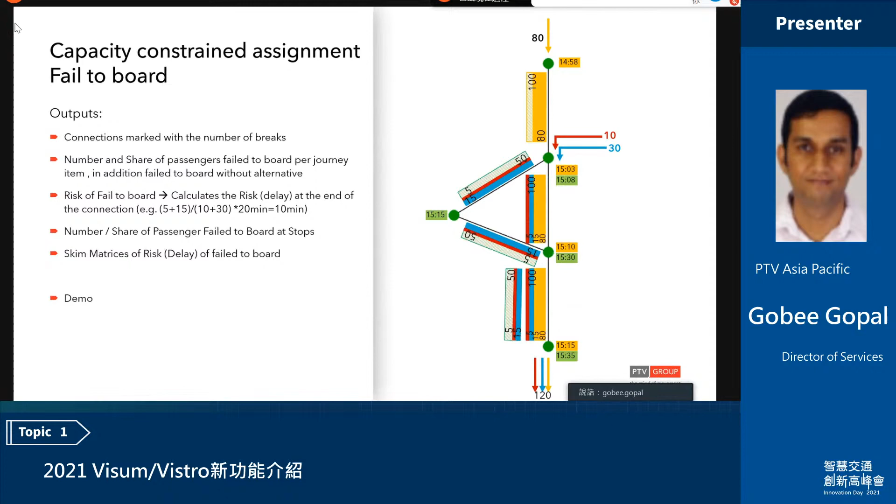So then the second feature in Visum 2021 is dispatching a ride-sharing fleet with e-vehicles. So in these features, we have put two main sub-features, which are limited range and long-lasting charging. So limited range, these are the ranges which can be included to make the dispatching of ride-sharing more efficient.

So battery electric vehicle, define ranges, conservative strategy, calculate longest distance to recharging station in network for buffer. At minimum charging threshold, return to charging facility, and recharging is priority. So no trips are served.

And the second feature which has been added is long-lasting charging. So now the user can define charging time, and at the same time they can define always complete charging cycle. So these two features will improve how e-vehicles operate in the Visum platform.

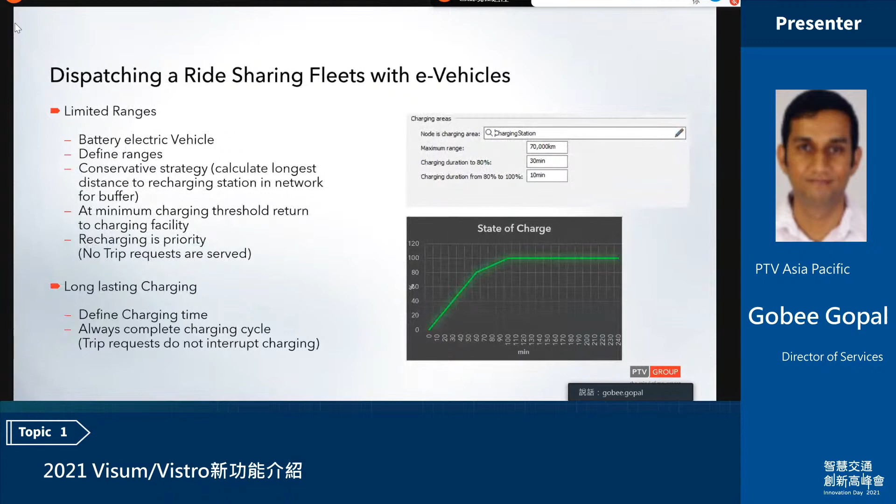It also ensures the vehicle starts at a predefined location in the network. Previously, the vehicle randomly showed up at the first pickup location. So this is for the ride-sharing improvement, which you can use in Visum 2021.

So then the next ride-sharing feature improved in Visum 2021 is the intermodal assignment. So for intermodal assignment, here you see the workflow of intermodal assignment. The crucial point is that for the route search and route choice, we need travel times of ride-sharing links. There's no formula which gives us the value.

So we perform a tour planning simulation and derive the travel times from the experienced travel times. To add some stability, we aggregate the experienced detour factor of all realized trips inside a certain main zone relation. Then the second step is we apply these average detour factors to the ride-sharing links.

So on the right side is the screenshot of the PuT path legs which you can define, and perform a new route search or route choice using the updated travel times.

So this goes around many iterations and takes some time. So there's a multi-iteration required, and at the end, we have a well-converged detour factor, but when we restart the assignment, we could not use that as the initial value. The point is,

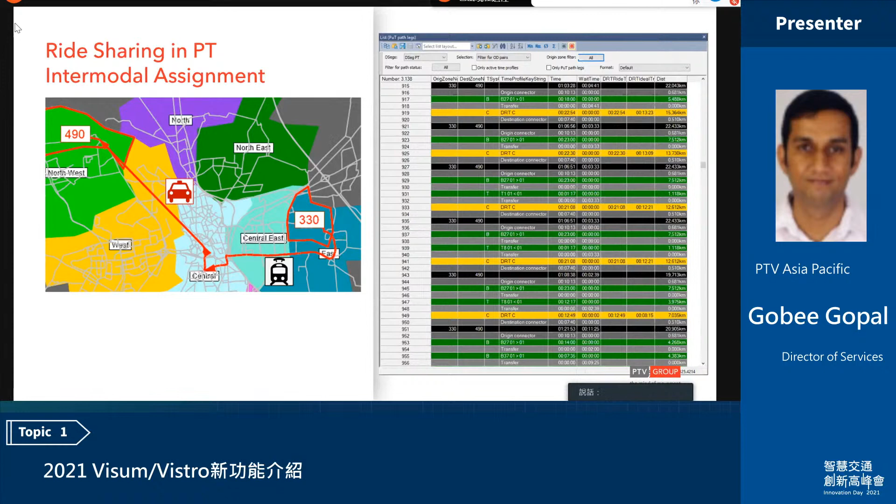the first search, for the ride sharing in PT intermodal assignment, intermodal assignment between private vehicle and public transport. Okay, so the improvement for the intermodal assignment is that it has been done faster, up to factor 2, more stable and faster convergence, a warm start.

So this is how the intermodal assignment works. If you look at the intermodal assignment workflow, the macroscopic and the microscopic. The macroscopic is more of the route search, route choice, then the split route. Then after that it goes more detailed, to the microscopic level where trip requests are generated, and then after that Visum will do the tour planning. Once this has been calculated, this will be passed back to the route search.

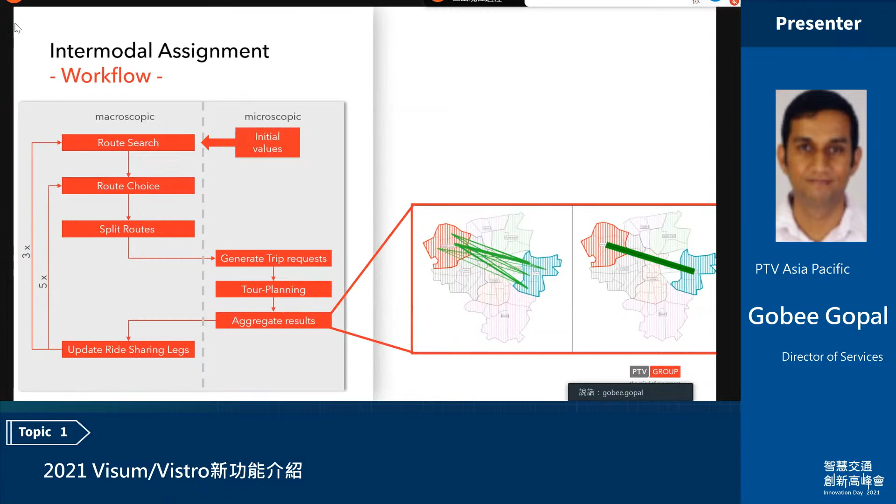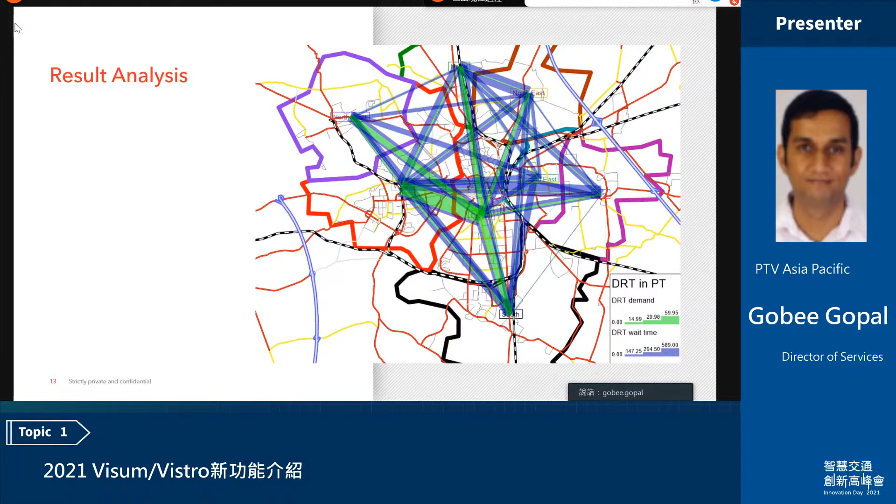So at the same time, after the tour plan is calculated, the result will be aggregated before it is passed to the macroscopic. And this is how it looks like in the matrix format. So the result analysis, you will see the DRT demand, so demand responsive transport demand, and the waiting time. So how long the ride sharing vehicle has to wait. Same time, what is the demand for the ride sharing vehicle.

So in case you don't plan, the DRT without tour planning, it's just between the route search and route choice.

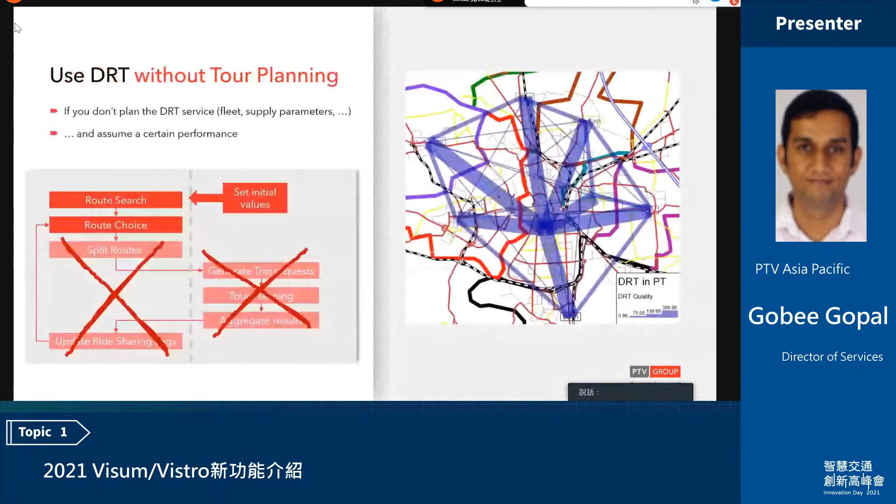So the third feature which has been improved is the auto demand calibration tool. So we all know that for the demand calibration tool, if model and reality have a different modal split, this tool is useful to analyze the reason for the difference. So person group segmentation is inappropriate or different behavior in different areas. Extend the model accordingly. There always remains a certain difference that cannot be solved. So sometimes manual calibration is extremely time consuming.

So in Visum 2021, PTV has included a demand calibration preparation. This demand calibration preparation is a built-in function which you can find in the Visum add-in, which automatically calibrates the demand model. So here I would just like to show that with this new feature it can do more than one demand segment. So at the same time, you can calculate the average model-calculated work trip, education trip, shopping, leisure, and home.

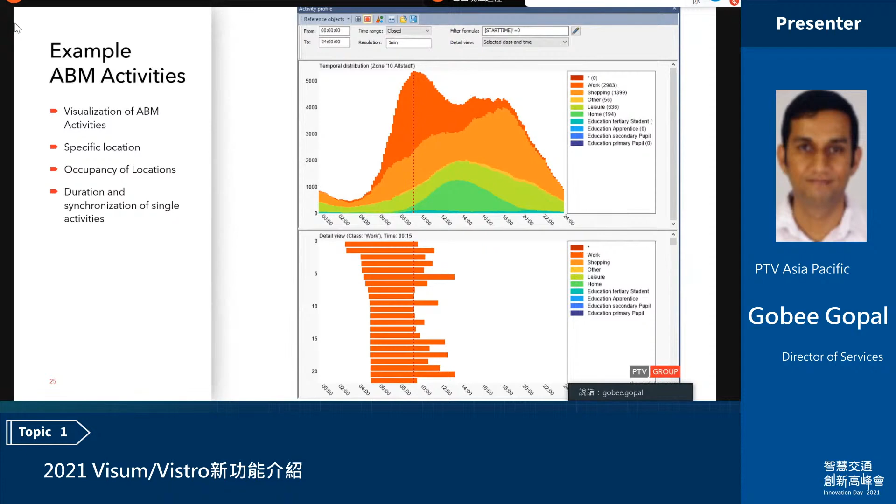And line blocking. So for public transport planning, previously it was similar, more in a tabular format. Now PTV has improved it and put it into more graphical features. So for line blocking, visualization of line block items, amount of buses to operate a timetable, classified by journey, layover, specific to charging depot, where you can define the number of charging stations needed or visualize the charging power needed.

So the last one for Visum where there is improvement in visualization is simulation-based assignment. Previously it was more of a color classification in Visum. A good example is the volume capacity ratio showing the bottlenecks. But now there has been a big change.

So the improvement we made is that with the SBA visualization output, you can see agent-based simulation. The motivation for that is to better understand the assignment result, to identify network coding issues, to support calibration efforts, and to present SBA results. So it's more animation rather than just a color classification. I'll show you a video.

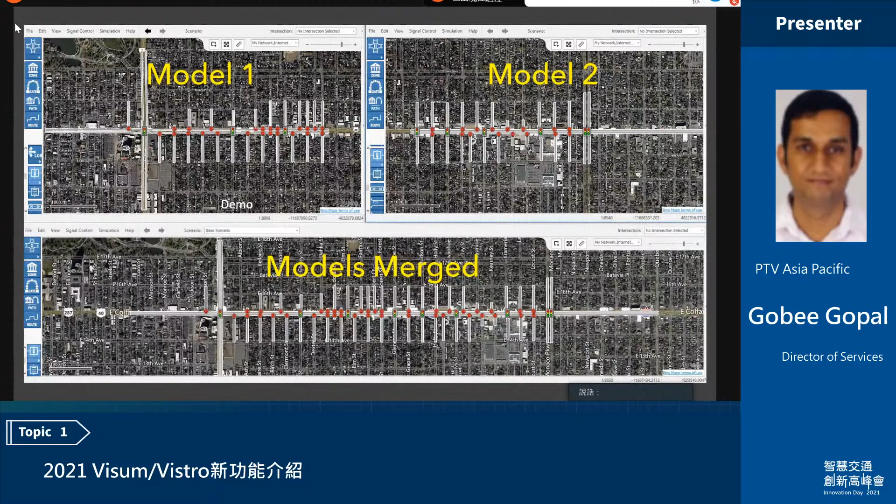Then model updating. Updating base model scenario data like signal timing, geometry, lane configuration, or volume. Useful for updating peak period, time of day information, or updating base model data from a test scenario. So the model updating feature enables you to convert external numerous base model files into one managed PTV Vistro file utilizing scenario management.

So with model updating features, you can import the turn volumes and the signal timing from a different model into a new model. So you don't need to do all this copy paste. You can see all these checkboxes: if you want to just import the signal timing, geometry, or turn volumes, then with a click of a button you can import directly into your new model.

So model updating includes traffic signal control summary to list and edit traffic signal control ID numbers. Manage your traffic signal controllers with an editable description field. Provide details about the signal controller like manufacturer, type, and last inspection date.

So under these features, you can create a traffic signal control database in Vistro, so that you can do a traffic analysis and at the same time manage all city-wide traffic signal control information in the PTV platform.

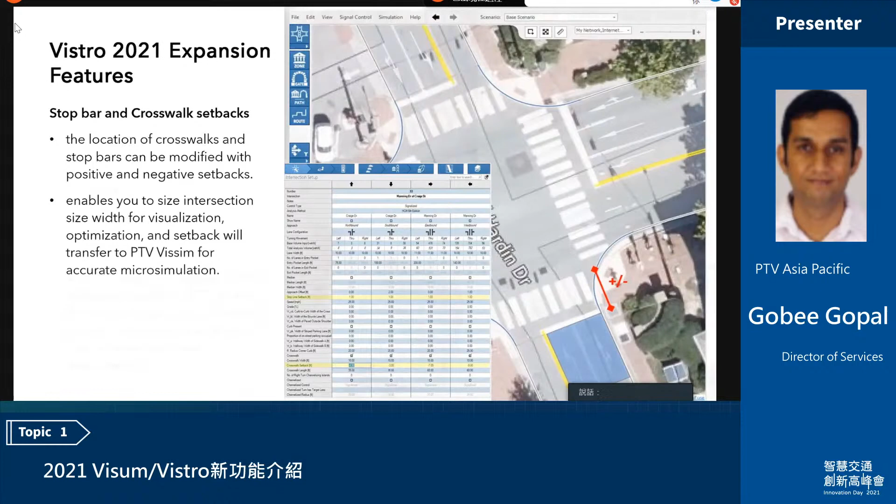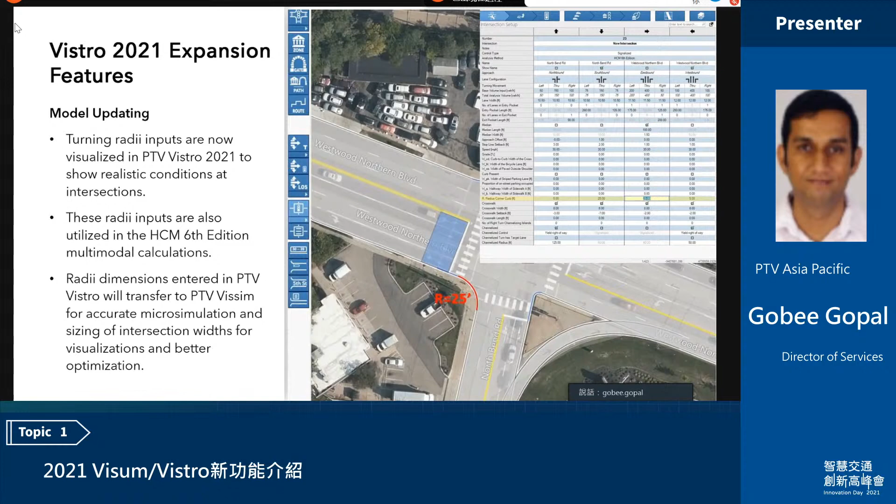So this is what I meant. With the previous version, when you export your network from Vistro to Vissim, you still need to do some minor adjustments, but now this has been minimized.

So the third Vissim improvement enables you to create a powerful 3D out-of-the-box simulation with a click of a button directly out of your Vistro 2021 model, resulting in huge time savings. You don't need to create and do the same work in Vissim. So once you have everything built in Vistro, when you export, all the 3D features are in Vissim.

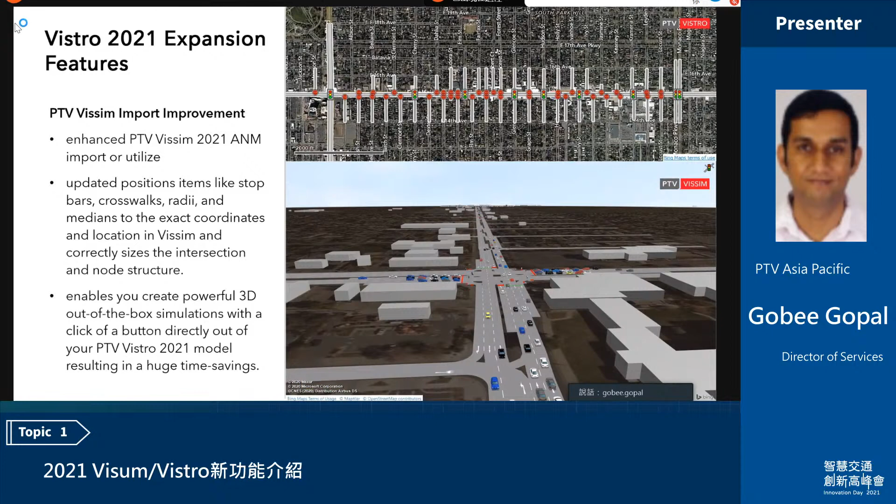Another improvement included in Vistro 2021 for Vissim import is the interchange detail or the geometry detail. So you can define in Vistro exactly how the interchange or intersection looks like. And once you're happy with the network, with the demand you can export to Vissim. So in this case, you can save a lot of time: you do all your analysis and optimization in Vistro, and to visualize that you can export to Vissim.

So that's all for Vistro 2021 and Visum 2021, the new improvements which PTV has introduced.

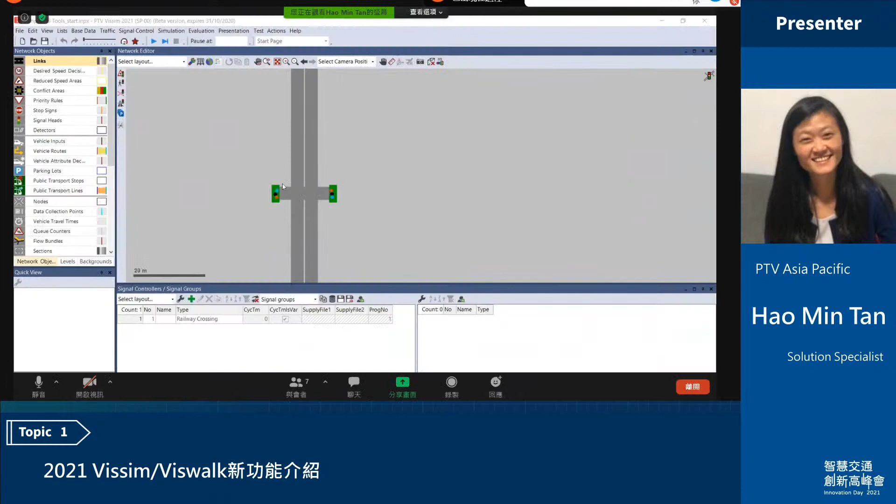So now I will quickly go to Vissim, and let me know if there's any issue seeing Vissim on my desktop. If you see here, what we have is a pedestrian walkway, with the vehicle link as well. This is the beta version of Vissim 2021. And you see there are these new tools in the vertical toolbar now.

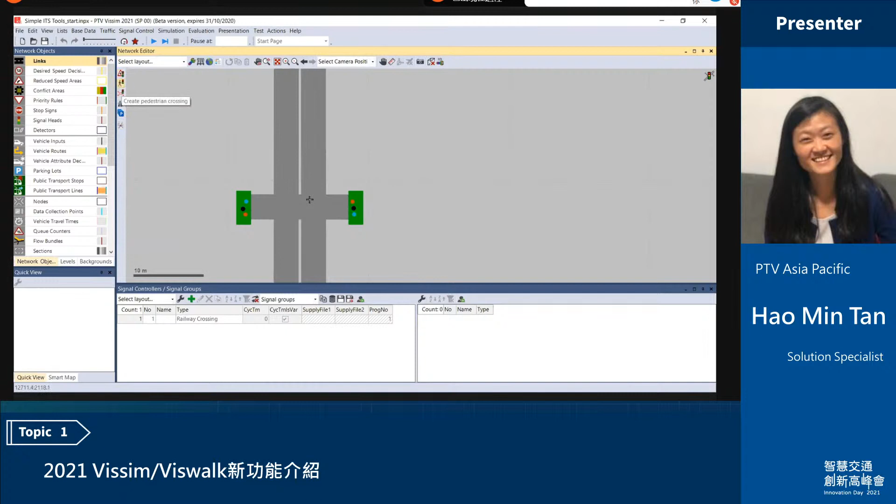If I click on create pedestrian crossing and just hover, I can have a preview of what it looks like, and if I'm happy with this, I can click OK. What happens is that it replicates the push button effect, where when a pedestrian is detected on the detector, the signal state changes for the pedestrian. A similar concept applies to the two-stage actuated signal controller. This is based on the major flow and the minor flow.

So if I click on this one and I say I want to create the two-stage signal controller, first I define the major flow, and then over here I click on the junction, and I again see a preview, and it is exactly what I want as well, where there is the actuation on the minor road, which changes the signal head for the major road, and once that is done, I click OK.

So in this beta version, the toolbar for the railway crossing is still under development and under review. So what I did here was already creating a railway crossing here, and this is based on the check-in and check-out. So when the train is detected over here, then the signal controller starts changing, and then when it checks out after, then it changes back.

And again, we will go to the newest one, which is the ramp metering. And for this one, you can again select straight from the toolbar, and then you put it on the on-ramp, and then the detectors on the major road. And then these attributes as well are changeable by the user, but now we use the default. And once that is done, you can quickly see how these actuated controllers are created.

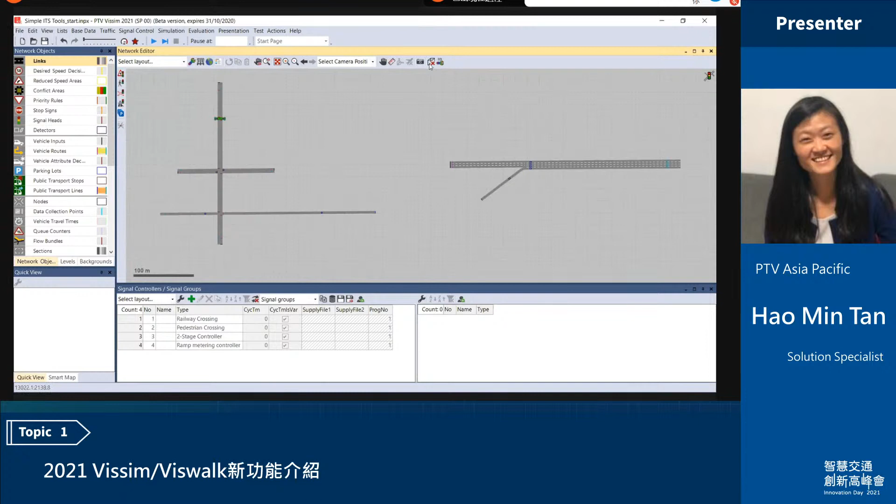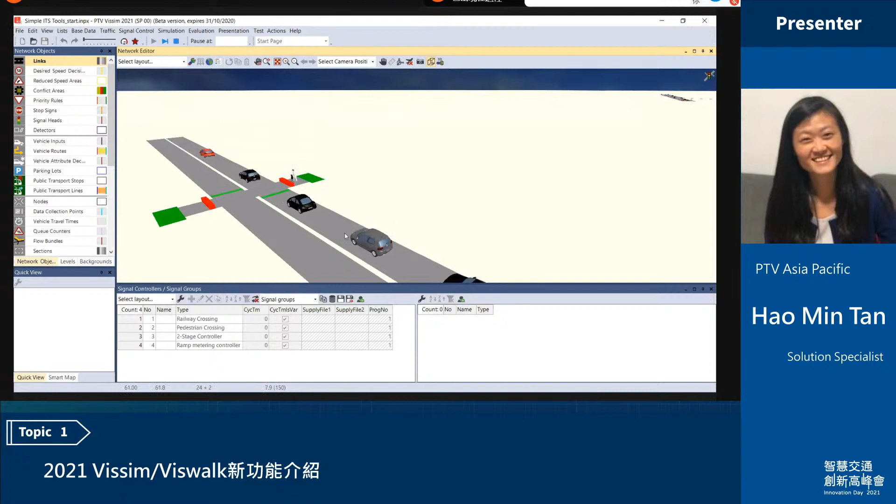I go back to the 3D mode and I play the simulation. And what you can see here is only when pedestrians are detected, then the signal changes for them. Similar concept as well for the vehicles on the minor road. Only when they are detected, the signal changes as well.

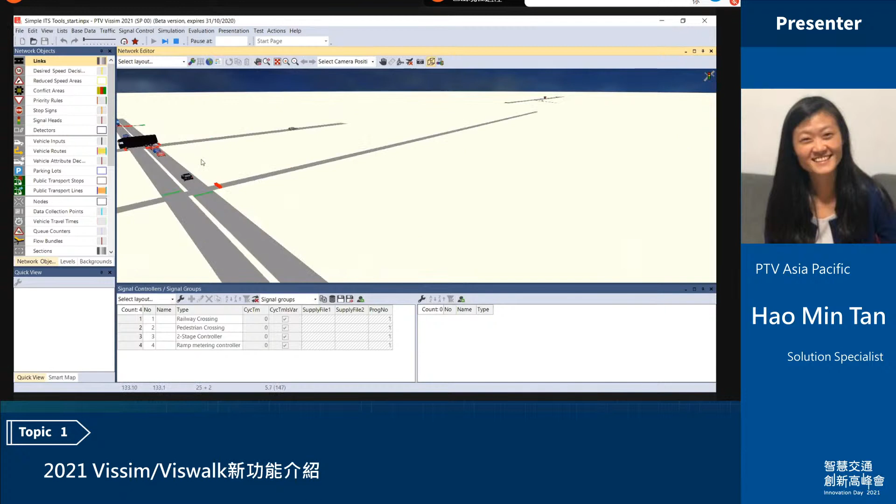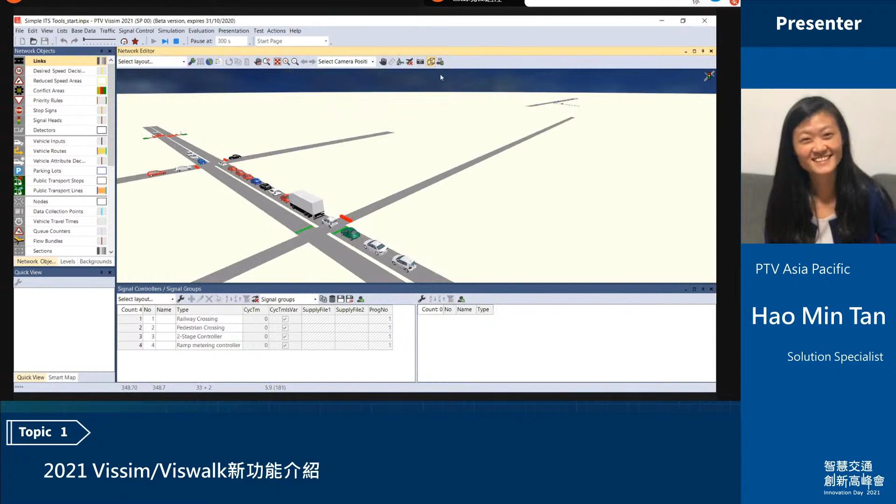And over here, let me just quickly go straight to second 300 when the tram is supposed to enter the network. And over here, you see that once it gets detected, then it just gets green until it goes through the check-out detector. So this is what we wanted to show from the simple ITS tools built in now in Vissim. And I will go back to the presentation.

All right, so that was a preview of the simple ITS tools in Vissim 2021. Going next into parking evaluations. So at first, a little explanation. In Vissim, there are the individual parking spaces, and many parking spaces can be grouped into a single parking lot, and parking lot groups can encompass a few parking lots. And in the old parking lot dialog, for the dynamic assignment tab, it's called the parking lot group. In Vissim 2021, we have changed it to destination group to better represent the meaning behind it for dynamic assignment.

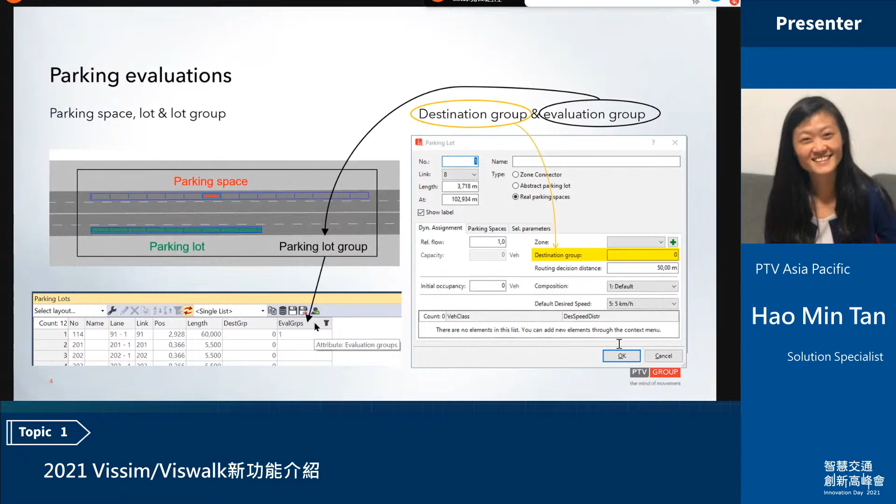And for evaluation group, we have a new attribute that is used for parking evaluations. Now you can find it in the list only, but after the release, it will soon appear in the dialog as well. So the new parking evaluations are available for individual parking spaces, parking lots, parking lot groups, and even for parking routing decisions. And on the right side, you can see that there are these new parking states available, including when vehicles are blocked while leaving a parking space or when they are back to their main route and driving to a parking space as well.

So what do you get from these new evaluations? Many evaluations for individual parking spaces, lots and lot groups, like number of vehicles entering, number of vehicles parked, the occupancy rate, the parking duration, and many more. And on the right here, you can see for parking routing decisions, there are extra evaluation outputs as well. And as usual, when there are evaluation outputs, for graphic analysis there is an improvement as well.

So if you see here under edit color scheme, you can have color schemes for individual parking spaces, like what you see over here, and then for parking lots made up of many parking spaces, you can have uniform color across, or even for parking lot groups encompassing many parking lots. And for individual vehicles, you can now color them based on the new parking state. So this is the look into the new parking evaluations output and the graphical analysis.

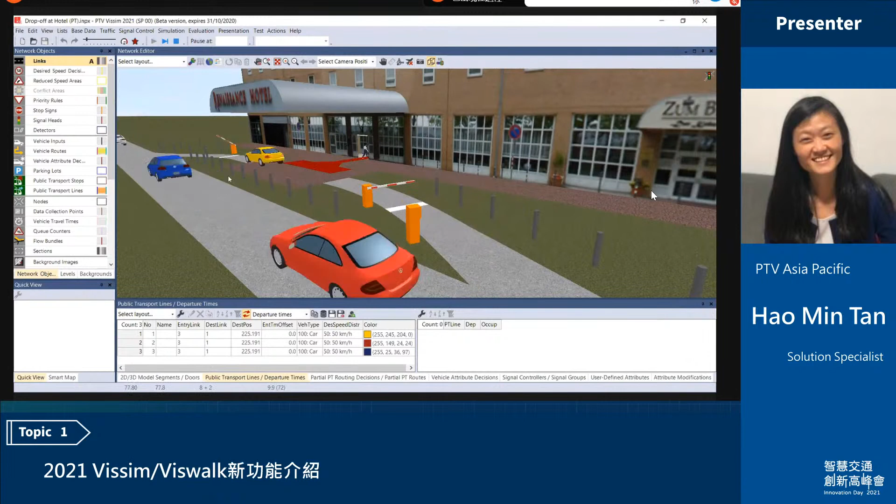And if you remember in the old example, previously there were two scripts done. So one script is to basically control the barrier movement, and another script is to generate pedestrians. But now if I go under actions, event-based scripts, you can see that there are no more scripts there. But instead, under attribute modifications, what we have done here is that there is the object type name that we want to change. This is where the barrier is, and we want to change the state of it.

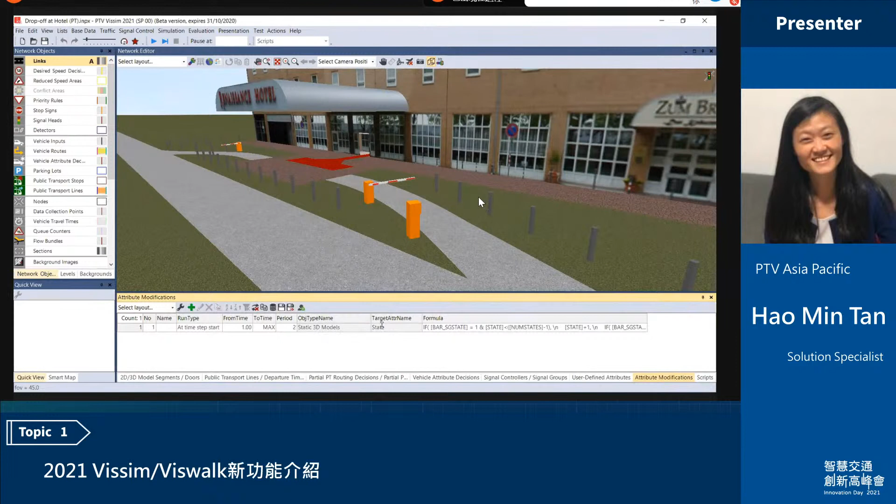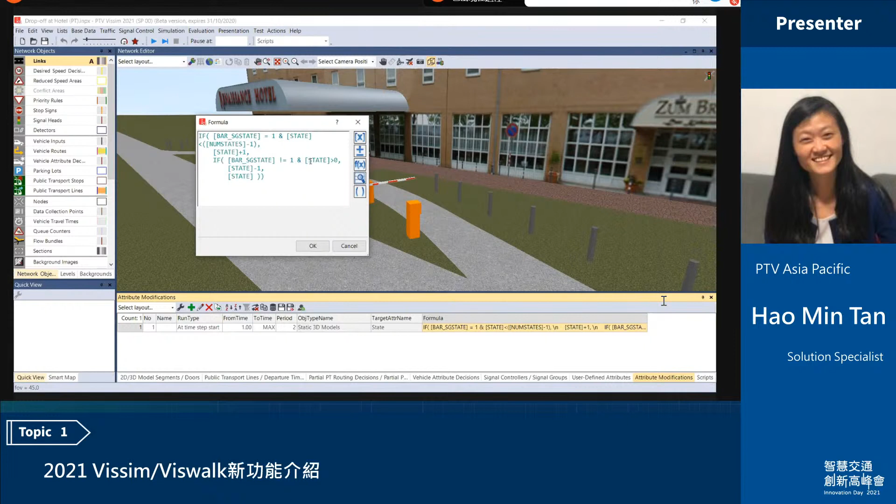And if I open the formula, it's based on the if condition where if the signal state of the particular barrier, later we will show how the signal state is linked, equals to a particular number, and the barrier state is less than the total number of barrier states minus 1, then we change the barrier state plus 1. If not, we remain as it is. And there's another nested if condition where if the signal state not equals to 1 and the barrier state is above 0, we change the barrier state minus 1. And if not, again, remain as it is.

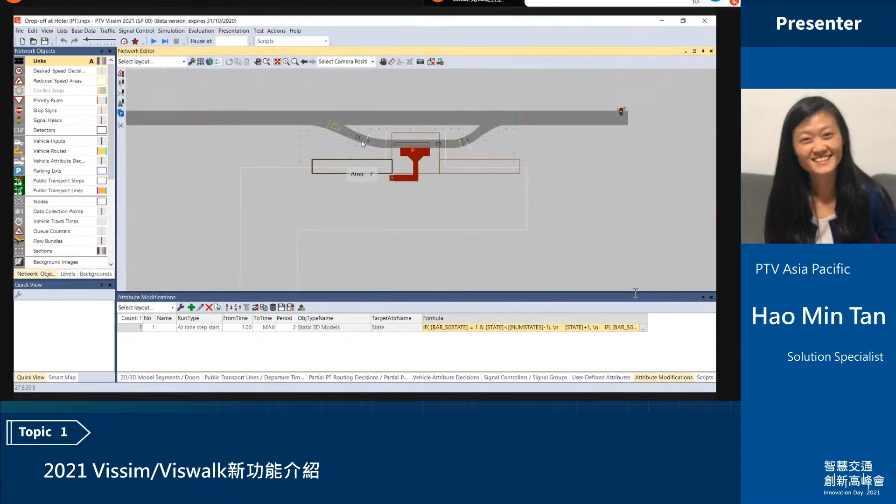And if I go into 2D mode for better explanation, what you can see here is there's a signal head connected, and based on this signal head, the barrier moves based on our attribute modifications we define here. And as you can see here, there are detectors before and after. And if I go under signal controller, this is based on the ITS tool, and this is based on the railway crossing. And even though it states railway here, you can see that this is a great use case as well, where you can get a check-in and check-out detector, and based on that, the signal heads change.

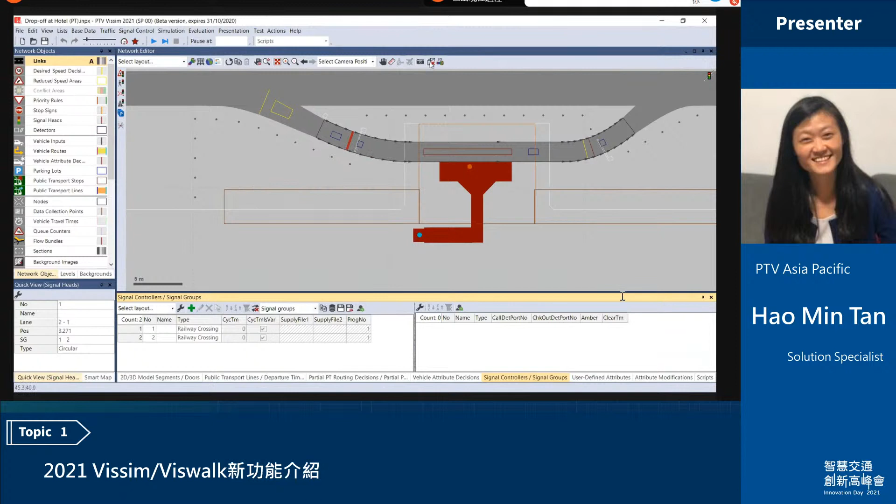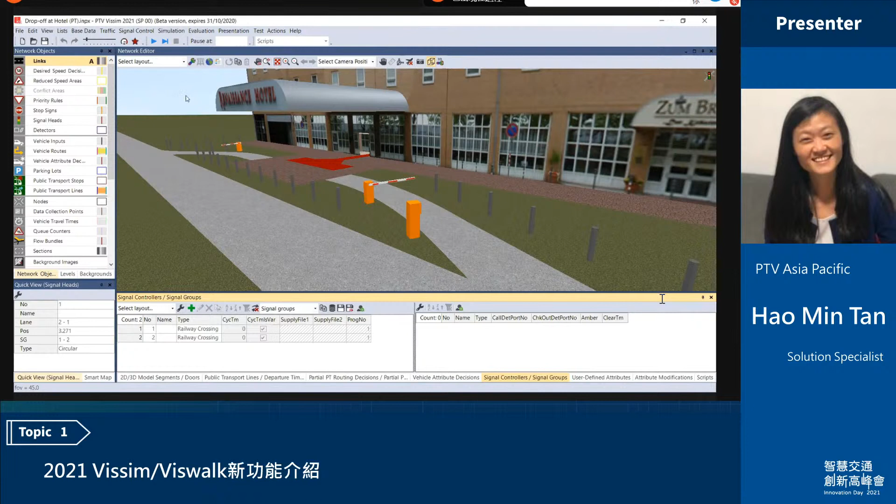And what is worth mentioning as well is how the pedestrians are generated if you don't want to write a script to generate pedestrians. What is done here is they are operating on a public transport line over here. So this is a bit of the introduction to attribute modification. So if you download our beta version now, this example is already in there if you want to check out more of the formulas and more information that you want to gather. And again, I will go back to this slide.

All right, so next we will go into the OpenDrive improvements, mostly for our customers interested in the driving simulator interface, where you want to quickly import an OpenDrive network that was done in another software, for example, VTD for autonomous vehicle testing. So now we have the OpenDrive improvements, and we support version above 1.4, and there is an improvement of lane widths, where if the OpenDrive link is of different lane widths, when it's imported into Vissim, connectors with short lanes each at the start and at the end are created. And as you know, in Vissim, connectors can then have variation in the lane widths.

And also there's the improvement of the elevation profile for links and connectors as well. And also COM access to the import OpenDrive functionality. And for the next feature, this is an extension as well of the 3D buildings that can be shown. And this is where we can show and hide the 3D buildings. And I think this can be further explained in Vissim, so I will show in Vissim as well.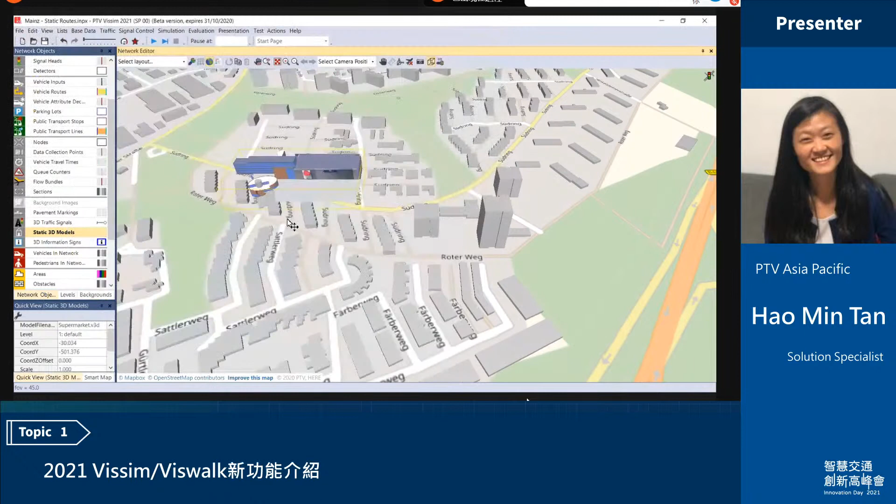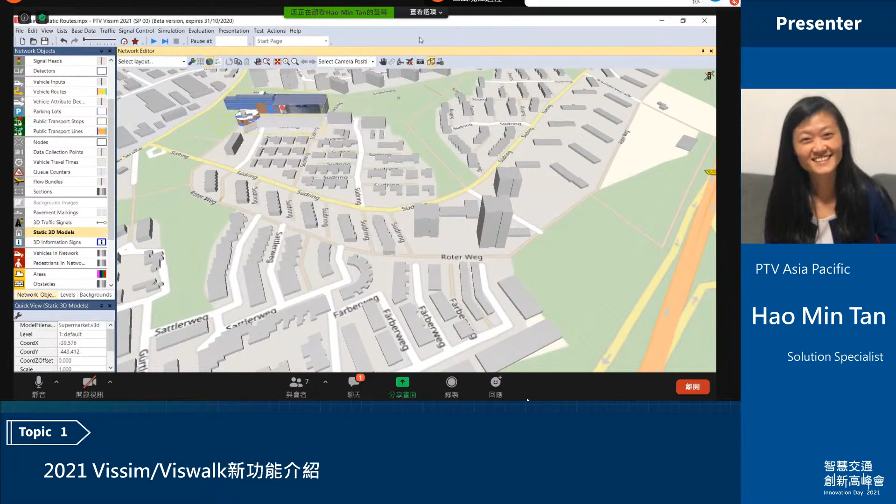And what is worth mentioning here is that if I have a static 3D model, for example, over here I choose a supermarket, and basically if I have a static 3D model that is overlapping with the 3D buildings, what happens is that your static 3D model will stay and the buildings will disappear. So there is no such double layer of the building configuration. Alright, so that is all I wanted to share about showing and hiding 3D buildings. And again, going back to the presentation.

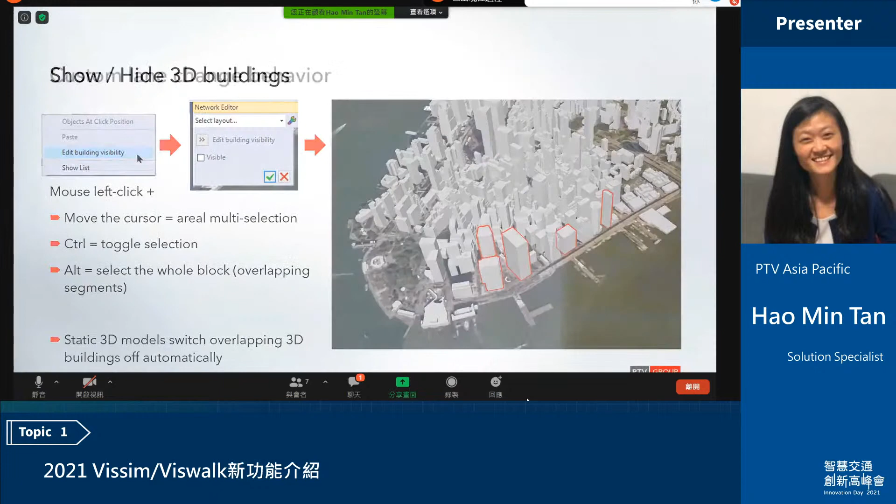So for custom lane change behavior, there is an improvement: if you create the exact user-defined attribute called smooth lane change, and it contains a number of free distribution, this is used as the course of change of the lateral position of the front edge when they are changing lanes. And if you add another user-defined attribute for driving behavior, exactly called lane change duration, this value is used as duration of the curved lane change. Otherwise, it will follow the fixed value of 3.6 seconds. Remember that normal lane changes still take 3 seconds.

For the next one, which is the multi-run changes to video and animation recording. In the past, you could not define the recording scope, where it would be recorded for every run, but now you can define an extended recording scope for first run and/or final run only. And another improvement is the speed up of simulation of 5 to 15% for bigger networks and even up to 25% as well. And now we want to give you a glimpse of Viswalk.

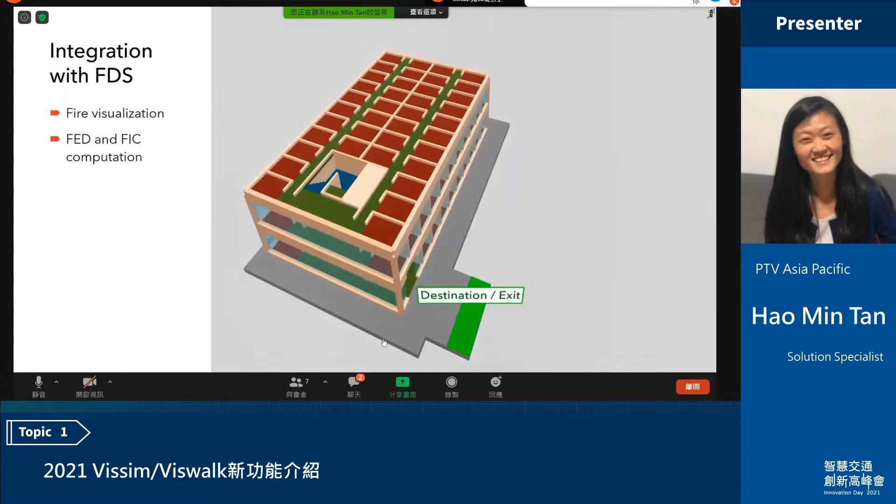So this video is just a refresher of what was done. And to mention as well, this is based on the RiMEA test case that's available in the example. And of course, the simulation output visualization is much better if you have smaller time steps in between as well. So if I quickly go through this video as well, just to show you a bit of the visualization of the burning of the chair starting, and then how people are evacuated.

And then you can see that based on the FIC output attribute, we can color pedestrians based on that to kind of see how exposed they are to all these irritants and all this concentration and dose as well. So for the fractional effective dose again, and how pedestrians are evacuating the building.

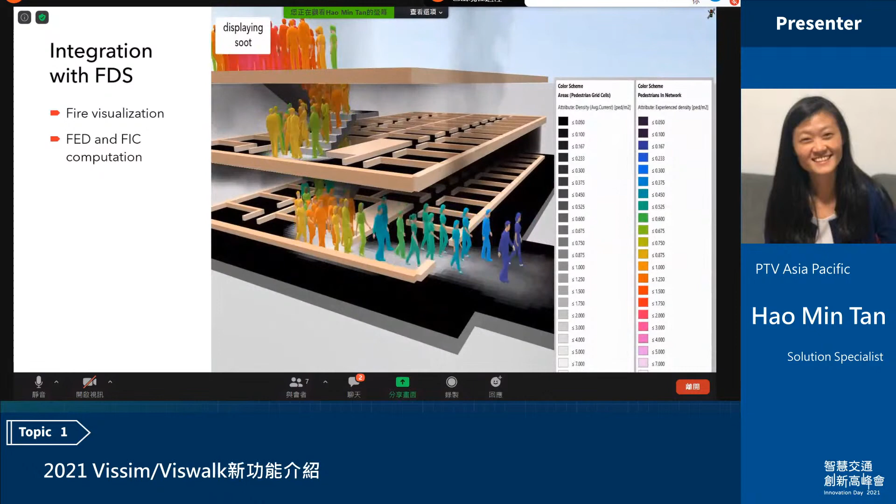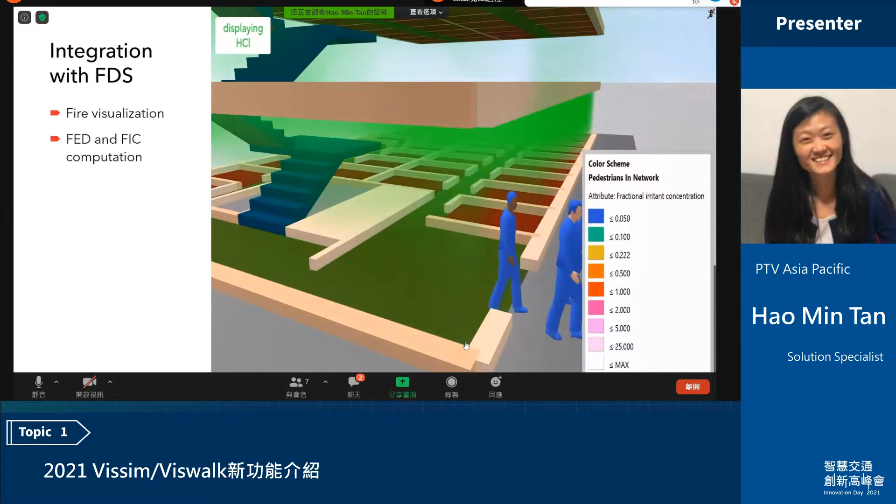And as usual, you can always allocate color scheme on areas based on density and other attributes as well. And then for pedestrians in the network, you can color them based on the experienced density. So again, the coloration of different, let's say, outputs of the 3D plot can be done and is based on your skill and your coloration to define very easily in Viswalk. And so this is displaying the extinction coefficient.

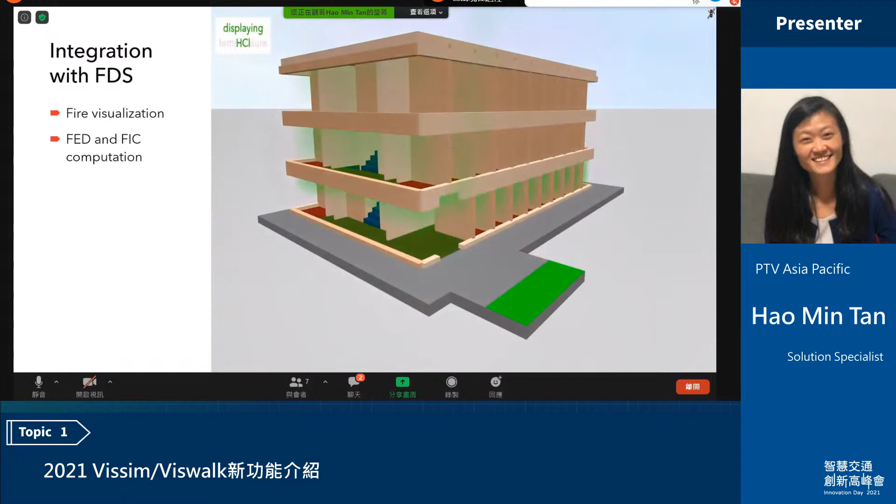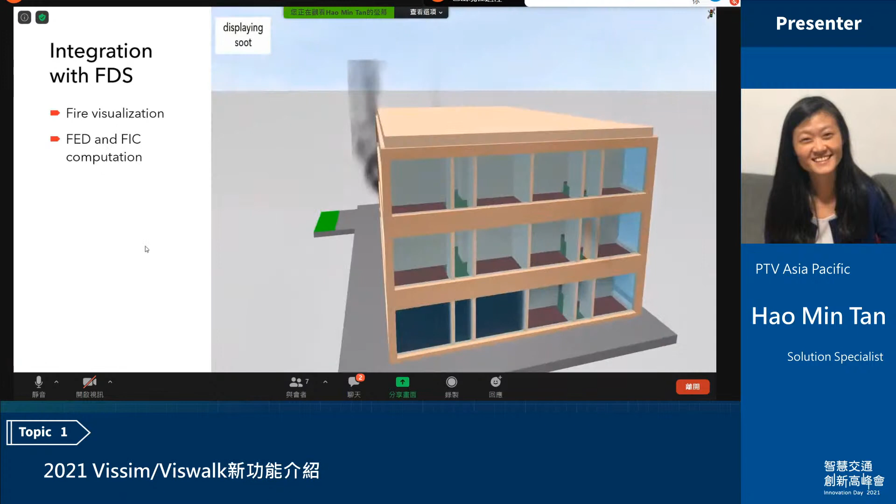And this is, let's say, displaying the carbon monoxide, and then the HCl, and for the soot as well. So various FDS output that you can simulate for visualization in Viswalk and for the FED and FIC computation. So going to the next slide for the new Viswalk fire safety improvements.

So ASET describes the performance of a built environment in terms of resistance against consequences of fire. So this is achieved by determining the time when tenability criteria of fire effects are exceeded. So this part of ASET is not calculated in Viswalk. But on the other hand, RSET captures the occupants' egress out of the building, and so this can be calculated in Viswalk now. So as mentioned, RSET map is a map representing the spatial distribution of required safe egress time, and it provides comprehensive information about evacuation dynamics of the scenario.

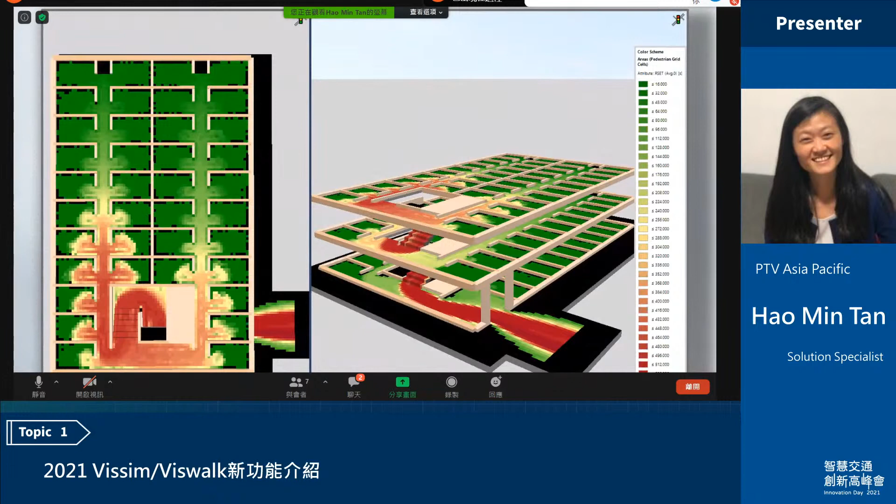All right, so that is our overview of the new Vissim and Viswalk features.